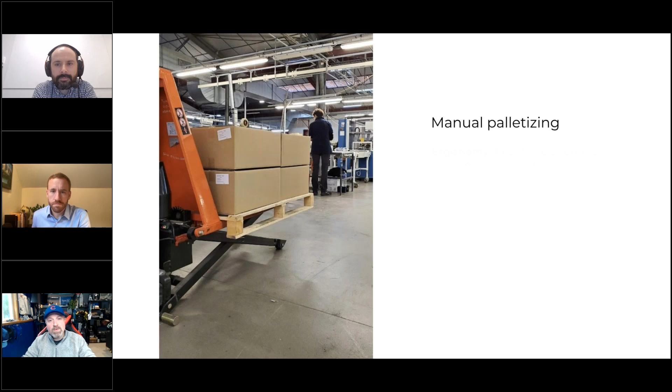Now, we want to talk a little bit about traditional automation. I think traditional industrial robots is a thing that we're looking at, and for a long time, manual palletization was a big thing that's out there. There was a lot of stuff, but as Ryan - thank you for driving these slides here - we saw a lot of ergonomic issues when it comes to a lot of repetitive tasks. That's where a lot of injuries were happening. It is time consuming. There's human potential where really there's opportunities for people to be doing better jobs somewhere else, where it's not just this boring dull area.

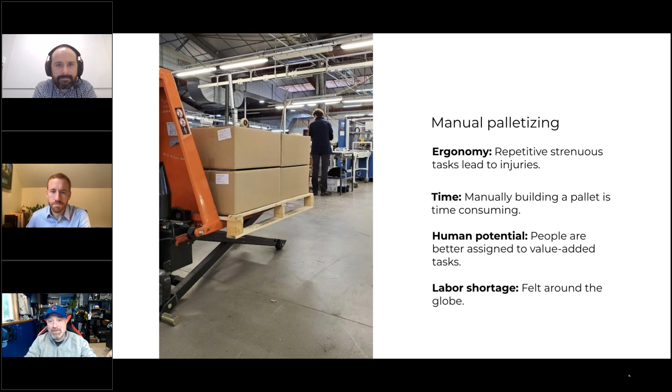I think what we're seeing today is tasks can be automated better with robots. But when we look at the traditional sense of what automation was several years ago, collaborative robots weren't as in depth in manufacturing as we once saw. It was very heavily industrial robotic systems, but there was a lot of risks when it came to that, and a lot of investment.

Ryan, I'd love for you to touch on that. What were some of the biggest things that prevented manufacturers in the past from putting robotic applications out there using industrial robots?

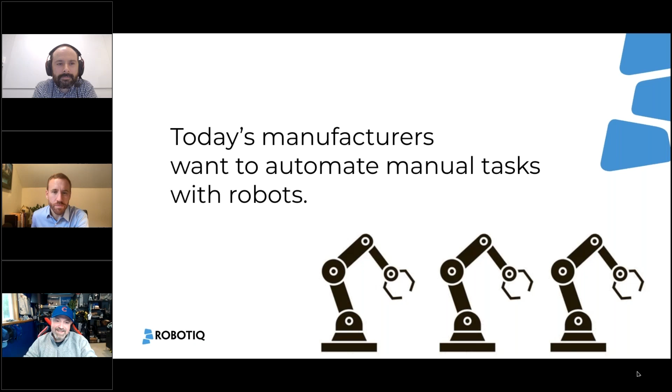But all that knowledge base is being outsourced, so you have to find someone who can do that work. And they're obviously in very high demand, but at the same time, those costs, the supply chain challenges that we're all seeing, they're facing as well.

There's a lot of equipment that has to go into a fully automated end-of-line palletizing system, the traditional way of doing it, where you're involving a lot more machinery, a lot more traditional equipment.

Yeah, absolutely. I think that's the big thing we're looking at, is a lot of companies out there are small to medium-sized businesses or small to medium-sized producers where they don't necessarily always have an entire controls engineering or robot programming team to handle a lot of these tasks.

We're seeing a lot of times for these companies who want to introduce palletizing for the first time, they might not have a lot of robotic experience before. And a lot of times when you're bringing in these industrial robots, you have to bring in a systems integrator or a big company that can handle that size of equipment.

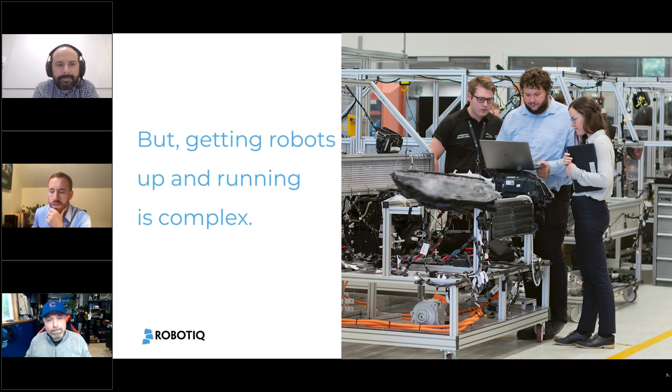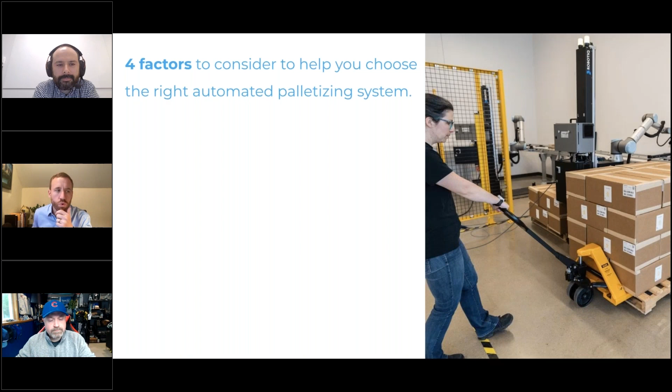Yeah, exactly. One of the things I'll talk about for a quick second is just some of the things we've observed when it comes to figuring out what is right for you - is Cobot palletizing the right solution, or is more traditional full factory kind of palletizing the right solution?

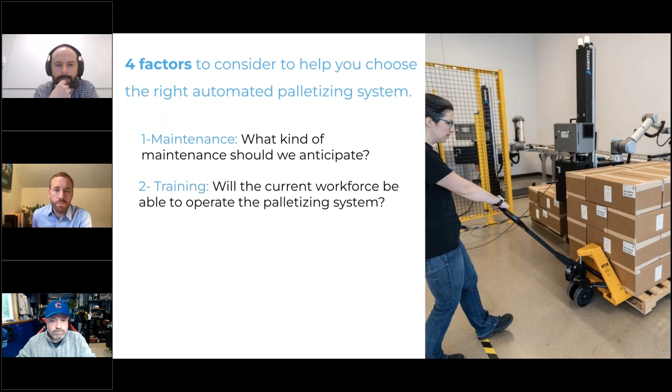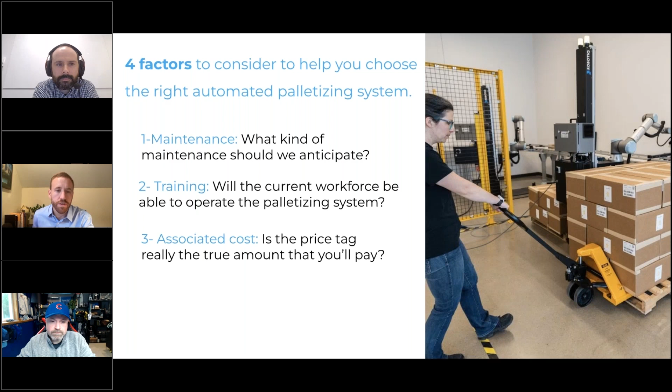Part of it is thinking about what kind of maintenance is going to be involved. How involved do you as an organization want to be in the process? Do you want it to be fully hands off, or do you want to get involved in some way or be able to upskill your workforce? In terms of the overall cost of the system, what does it take to run versus what does it just cost upfront? And then of course you want to make sure that things are safe.

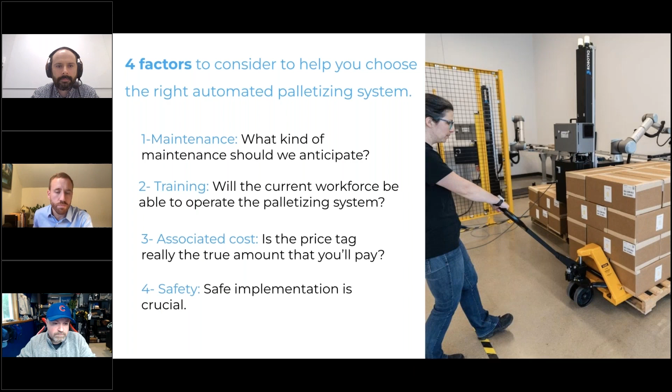So what does that look like? Are you going to have to exclude all your workers from the area, or is it something where you could be sharing workspace, like a collaborative robot, for example?

And that's where I think you were getting to, Jake. Of course with Robotiq, our philosophy is really we want to not just automate the process, but help you elevate your workforce. And if you're looking for something that can be done flexibly and quickly, that's why we've developed the Robotiq Palletizing Solution for that much more lightweight, more nimble deployment for handling that end-of-line palletizing task.

Yeah, absolutely. One of the biggest things we're seeing right away is what's separating an industrial robot palletization system versus a collaborative robot palletization - we're seeing positives and capability on both sides. We know an industrial robot has higher payload, higher speed in a lot of cases, but for the food industry it's a lot different than automotive, where we're often palletizing a tire or a metal component. In the food industry, the casing isn't always as heavy, and that's why we might see value from a Cobot palletizing solution.

Now, Nick, I want to bring in your expertise a little bit. When we're looking at this stuff, can you walk us through what a solution looks like, or what the process looks like from an end user or partner perspective, on how you would begin to deploy and determine if a solution like this would work for them?

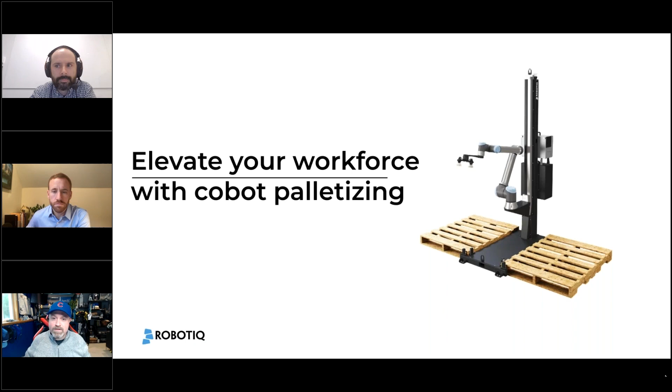Yeah, sure. And while I'm pulling up the slides, one thing that I would... maybe, yeah, just one second, I'll take control out of it.

So one of the things I would add on top of what you mentioned is that with industrial robots, it's basically a big jump when you have to change the layout of the full factory. With Cobots, it's possible to do incremental automation, which is much more applicable to the food industry.

Just give me one second. All right, can you confirm that everything is all set? Yes, we see the screen.

All right, perfect. So I think one of the really interesting things once you start a project is to have a clear view from the start about what it's going to look like. With the palletizing application, it's interesting because it's a very standard application. If you look at different customers or use cases, it's going to differ case to case, but the vast majority of the application will be quite similar - we are moving cardboard boxes, for most situations, from a conveyor to a pallet. So it's easy to standardize the way it's going to be deployed.

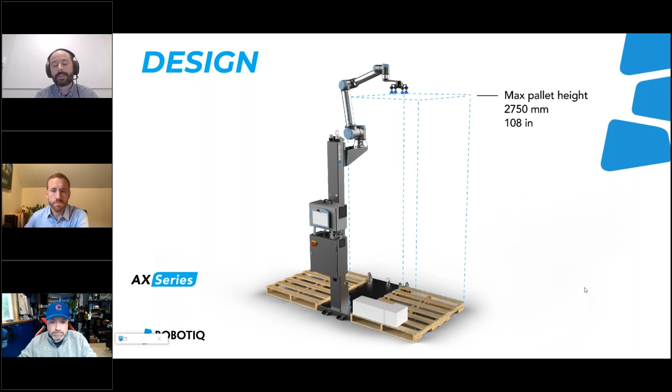Or if it doesn't, can we then build our new pallets in a way that are much more efficient and can be stacked as well? So here's an example - it looks like our max pallet height can be up to 108 inches, or 2750 millimeters. That's quite high, and most of the time it's under this. So in many situations, you'll see from the simulation that this product with this kind of tooling is able to match the application requirements. So if you get a standard product, you're able to know the pricing for the whole system very rapidly. That helps start the discussion and gives a clear view of what needs to be done.

That's what we call the design phase, where I have discussions about what it would look like. The interesting thing about Cobot palletizing, and our solution more specifically, is that once you decide to go forward into production, the integration time is a lot reduced. By building on standard products, the amount of work required to get one robot into production is reduced compared to custom-made solutions. That enables fast deployment, and regardless of who's doing it - a system integrator or a do-it-yourself approach - the fact that it's faster really helps deploy more systems more rapidly.

As you see here, we have different components all tied together - the pallet sensors, the tower light showing the actual status of the system, and all the motion of the linear axis responsible for controlling the robot and the linear axis in a coordinated fashion. It's all pre-wired and pre-integrated, so that's a lot of things you don't need to worry about.

I think one of the exciting things here is that when we look at traditional automation, it's one of those things where you don't know if your application is going to work or not. From an end user perspective, you can go in here, plug in some information, and determine right away if this solution will work for you, rather than having to invest a bunch of time figuring that out. With the online tool, it sounds like with the information provided, you'll get a pretty clear understanding of whether this palletization system is going to work. Is that right? Yep, exactly - that's the whole purpose of the system.

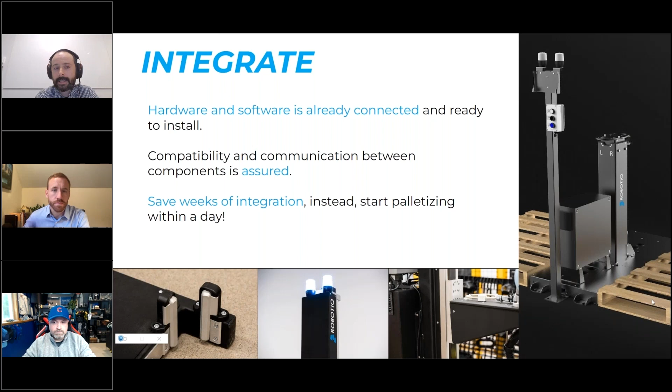I think the other thing is that the configuration side of things is all based on real world simulation data, so you're not just getting a rough estimate. You should have a pretty accurate sense of how many boxes per minute, for example, and whether the reach range is going to work - it simulates that full application. You'll actually see it play out live, and you can share it too, to get that visual of whether it will handle your own product. Yes, exactly. Pulling back to the configurator on the website, the actual software doing the simulation is the exact same software running on the robot. There's no difference using the payload - the motion is calculated the same way it would be on the real system. So basically, it's what you can expect with the real system.

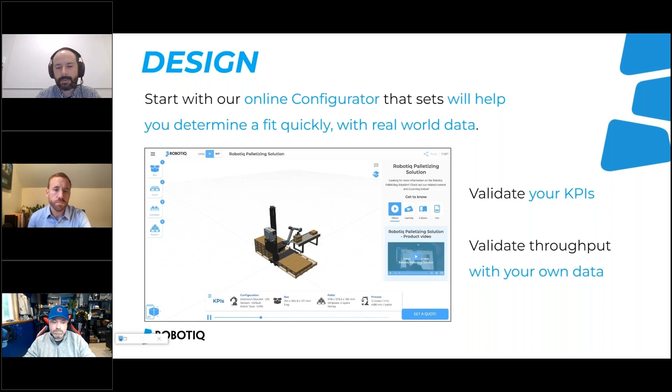Once everything's set up - and we have examples we'll show - of systems that were installed in one day, where you're able to get your first pallet done in one day. Of course, usually in production you take some time to train staff and integrate this into your own process, but the integration time can go really quick. That's a big advantage of it.

So there's the hardware part that we've seen, everything connected all together, and there's also the software part, which is a key component. When hardware and software are designed together, like our palletizing solution for a standard application like palletizing, the software helps the hardware and vice versa.

It's all tied together. The different steps required to program the pallet pattern, the fact that the software knows the cell, what it looks like and where the obstacles are, makes the integration process and trajectory generation really smooth. These 3 steps - box definition and dimensions, the pallets, and the pattern - are really the only 3 steps you need to do to make the application work.

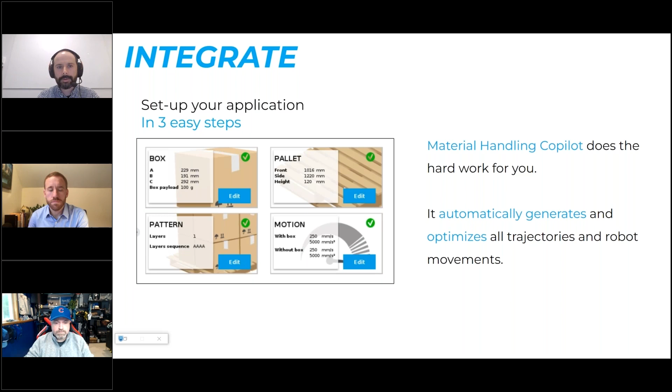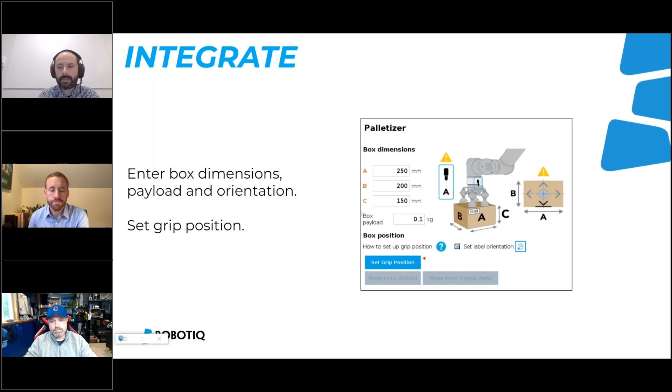The first step is just the dimensions of the box, and depending on when they arrive on the conveyor, where the robot needs to pick it - we call it the grip position. The grip position is the only position you need to program on the robot. Everything else is calculated automatically because the pallet is referenced with our base. Once you get the payload and label orientation, if it's required, you have this first step defined. It's really done in a natural way using just the dimensions.

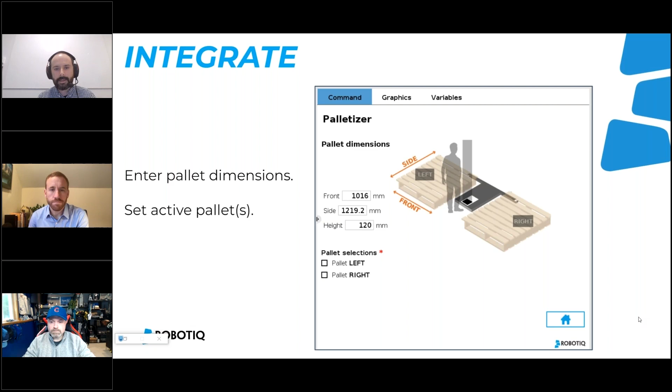The pallet - are you palletizing on the left, the right, or both pallets? That's here that you can define this. Once you're ready, you can define how the patterns are going to be built - how the boxes are positioned on the pallet, how the labels are oriented. You can have alternate patterns on each layer so you have a more stable pallet. So basically all the pallet, the way you want it built, you tell the system in a really visual way right on the robot itself. It's very easy to get this all tied together.

This is really designed around a recipe-type format where we can go in and, with an understanding of what our box looks like, what our pallet looks like, and the levels in the stacking area, we can build that. A lot of times if you're deploying your solution on your own, you have to build in all the different locations for drop-off points and all this. This is built into the software. So when you go through that configurator - your boxes, your pallet size, your location - the system will automatically build all of that for you.

Ryan, we were talking earlier about an example where a customer was unboxing or uncrating the system in the morning, and in the afternoon they were already doing a runoff, building a pallet.

Exactly. And that speed to set up doesn't just apply for deploying with one product. One of the big themes I've seen walking through different plants is they've got various lines running product for Costco, Sam's Club, BJ's - the warehouse type stores - and then maybe your local grocery store, and then a CVS or Walgreens gets a different pack. So you've got these different varieties of package dimensions you have to produce for different retail clients. The ability to set that up quickly also comes into play when you want to set up a new job because your box dimensions changed, or you've got a different pallet size going out somewhere else. You can very quickly define all of that in really 5-10 minutes time, and you're running an entirely new pallet setup. You can save that to the robot so next time you just go file, load, and run that exact same SKU all over again.

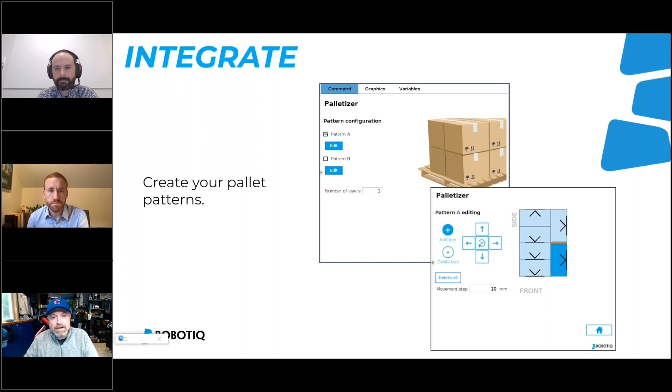So that's quite an advantage for that system. Can we talk about some examples of cases that you guys have done in the past, what some deployments have looked like, what that program looks like, and how we've seen success or what different companies have done for that deployment?

Yes, sure. So let's give a few examples. I won't go into the details of what each of the products are being palletized, but just to give the story behind these cases.

So this is the example we were discussing before, where our distributor basically arrived on site at the customer, at the end user, in the morning, and in the afternoon they were able to do their first pallet. So really it shows that this one-day installation, doing first pallets really quickly, is something that has been proven over time.

It's been almost 2 years since we've launched the product. We are almost at 200 palletizers deployed. So that's something that really we've been able to see over time, many times - that speed to deployment and really going faster.

So the typical way it is done is you often get an expert that will do the installation and the integration, and being able to train all the staff on site to be able to be autonomous. But once that system is deployed, the operation itself - it's really the manufacturer that takes control of their machine.

So what you've seen in the previous part about the visual way to define how a product is being palletized, this is easy enough. That's the only step that is required to actually add a new product. So it's really easy to switch from one product to the other and also to add new products, and that's typically the way it's done.

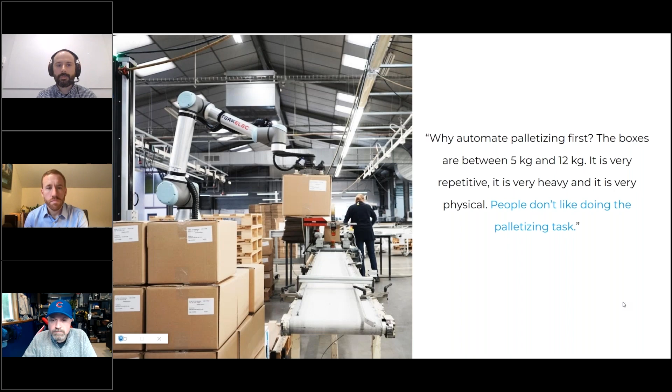So that's an example. Here's another one where we have been able to show that sometimes in a manufacturing line, the same person is actually doing more than one task. And when the person doing the palletizing is also responsible for other tasks upstream, it's difficult to get the full potential of the line.

Using this palletizer, in this example with this manufacturer, it was possible to increase the production level of the whole line. So that's something that is an enabler in many ways, where using all the equipment in the line, using that additional automation part - that's really just an incremental automation - will allow the same staff level to produce a lot more.

And what does the power demand look like for this? If we were going out there and we wanted to deploy a solution like this, what are the requirements? A lot of times we're going to need air for the application - what's the power that a lot of these systems are going to require?

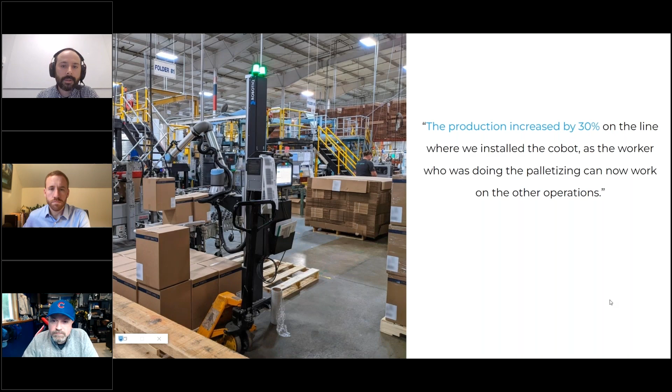Yeah, so that's a good question. And so the robot - one key thing of the Cobot versus industrial robots - is this robot, and even with the palletizer, with the linear axis, everything can be plugged into a standard electrical outlet. So the 15 amps that you have everywhere is what we would typically be using.

And I think that's a big thing as well. When you look at deployment, you don't need to go out there, you don't need to go back to your MCC and figure out how to put down a 220 or a 3-phase drop or something like that. You have the ability just to plug into a standard 110 outlet receptacle and be able to bring the solution up and get going.

That's exciting. So what are some other ones that we're looking at, Nick? I know we're about wrapping up on time, we have about 4 or 5 minutes left. Is there another example that you'd want to share just as a good case study that we saw?

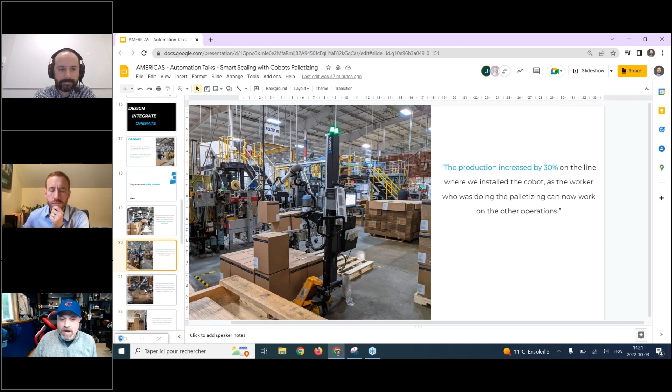Yes, so one other example that I could talk about is just to show the variety of different applications that we made.

We've discussed the different pallet heights that we're able to cover, up to 108 inches, and we can see examples of palletizers being deployed where that makes a difference. If you compare our system to other cobot palletizers, the stroke of the linear axis, the way the software manages the trajectory, and the way we optimize all the design means our palletizer can do a lot more than the typical alternative. Basically, if you look at doing palletizing with a universal robot, with our solution you're able to get the most out of your cobot.

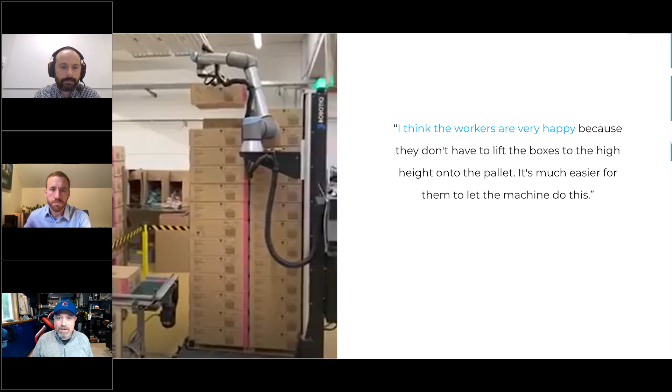Awesome, fantastic. Well, what are some takeaways that you want from this webinar, Ryan? I think the biggest thing for me was the ease of being able to understand if the solution is or isn't going to work for you. That's the biggest value I see, where a lot of times in the industry I'm out there trying to find a million different opportunities or options. With this, the configurator is the biggest thing I saw - does this fit within the constraints of how I'm building my pallet, does it fit within the constraints of my box and the weight I need to move, and then what does that deployment look like? That was the big thing I took away.

Ryan, what about you? Yeah, I think that's a great point, a great first place to start - hop over and take a look at the configurator. Of course, for a lot of you out there this is probably your first automation project you're considering for end-of-line palletizing, and for some of you it might even be your first robotics project. Cobots are an incredibly great way to start because of that accessibility, the ability to get into it easily and quickly. A lot of the hardware we're talking about is available within 2 weeks.

You can be palletizing on your floor in terms of getting a hold of everything. But to me, another big takeaway is what we call return on learning. It's not just what is the return on the investment, it's also what are you going to gain by learning to deploy robots or cobots specifically on your plant floor. How are you going to help elevate that workforce team, the people doing the physical palletizing? They can up their game and contribute more to your business and ultimately add more value to your end customer.